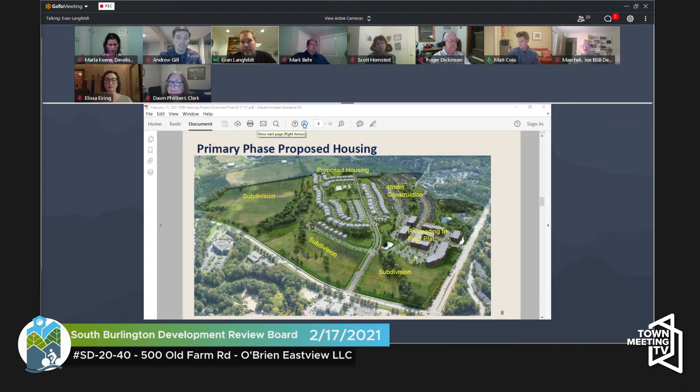Some are strictly residential, some are more mixed use, and some are more catered towards strictly commercial. What we've tried to do is create a holistic plan here. It's one of the last remaining large parcels in the city in the core development and density area. Our goal is to have a pedestrian-scaled development with a variety of uses and living styles, where you can walk to work and have amenities close to home.

You can advance to the next. So this is another aerial rendering, showing a broader conceptual build out of the site. I think what this really does is give a flavor for the long-term vision.

This refers to the energy and environment and the core location. So Eastview is proposing development that's centrally located in the city's core development areas, as designated in the comprehensive plan—services and employment that reduce commuting and associated environmental impacts, using existing infrastructure capacity and public transit to access them. So again, what we try to do is align our development very closely with what the comprehensive plan specifically calls out for.

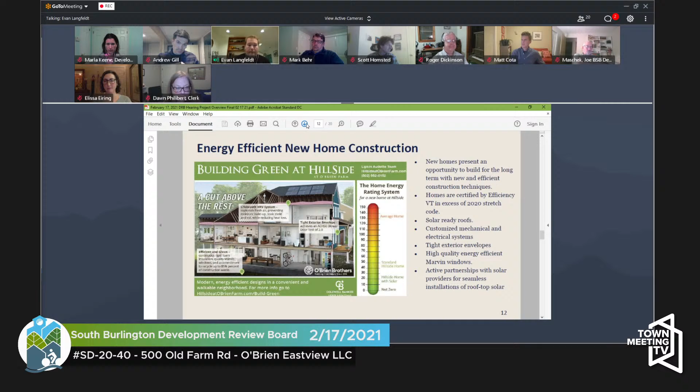That allows us to reduce the number of truck trips required to bring in material or truck material off site. Folks watching the Hillside development take place know there was a lot of rock to be dealt with, but the reduction in keeping that truck traffic off the surface roads was pretty dramatic.

The ability to reuse that material on site is something we should all be striving for in our projects. If you can use the resources that are there, you're not only saving surface traffic, truck traffic, wear and tear and congestion, but you're also reducing the fossil fuels and smog associated with trucking material in and out.

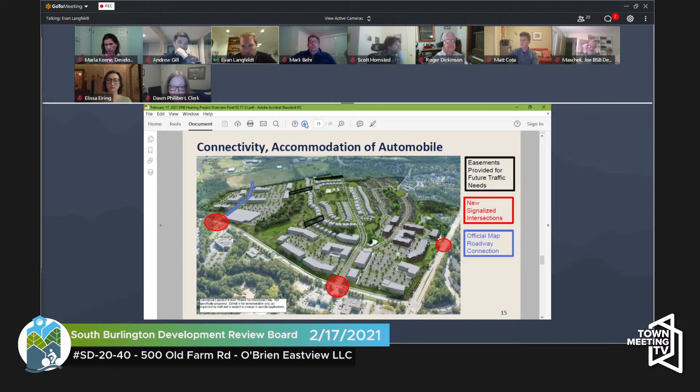So we can advance to the next screen.

The green space and recreational amenities planned for the project include two significant green spaces. The Hillside project features one that is a park containing a playground—if you've driven through the Hillside development, it's kind of a football-shaped park with a playground facility, landscaped, etc. We also have more natural areas, buffer areas, and walking paths, including a walking path around our stormwater area, plus some resource areas we've protected.

Eastview is going to continue along with that mindset. We're going to add 5 more large green spaces, and the combination of Hillside and Eastview will offer 35 acres of green space, equating to about 25% of the total project area—roughly 25% of the 145 acres will be open green space, which is a significant investment given the acreage of this property and the density of the area it's being developed in.

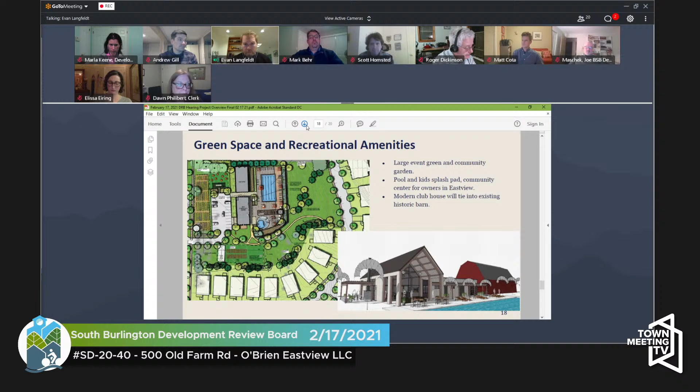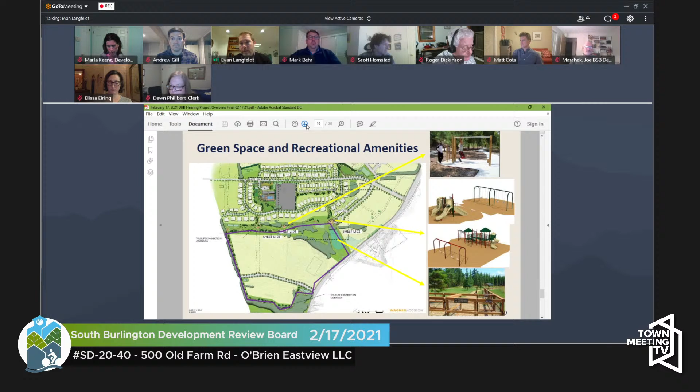You can advance to the next. So again, this is just showing some of the ideas that our land planner Joe and others have come up with, Wagner Hodgson have come up with, for how we could really energize and activate these walking trails and really engage our residents and the broader public into the green spaces.

We can advance. So that's really the end of the high level. I know I drove pretty fast there, but I figured we'll get through that and then get into the meat of the staff comments. But if any folks have questions or comments right now, I'm happy to answer them. Or if you guys just want to dive into the city comments.

Yeah, thank you, Evan. Appreciate that. Board, do you have anything you want to say over the general presentation or before we start staff comments?

I certainly heard a lot that we'll need to get into specifics, but perhaps the best course of action is to start where staff has reviewed and see how far we get tonight.

Starting with the context, going right to page 3. We're talking about 135 homes, a single family duplex and 3 family dwellings, as well as the residence club, as we just saw, 19 commercial developments. We are just talking about in this preliminary plat, just the homes and the club. We're not talking about any of the commercial developments. Is that right, Evan?

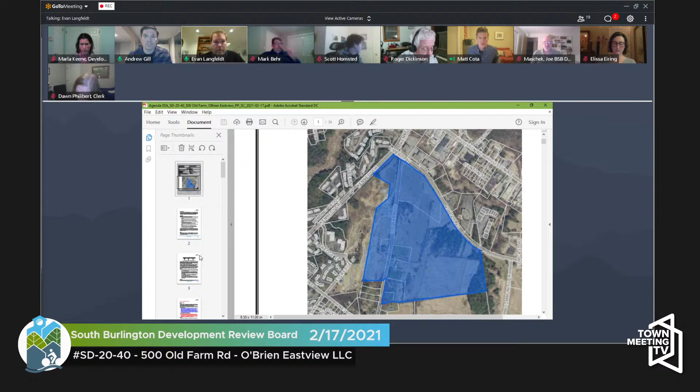Yes. Yep. Okay. So the first comment from staff is regarding phasing. As you know, we like to know when things are planned and to ensure that they happen in order. Staff recommends that we require you to provide a specific proposal for phasing, including triggers for specific features to include the recreation path network, parkland and amenities, trail connections to hillside, temporary gravel access to the exercise loop itself, improvements to the south end of Old Farm Road, and traffic improvements, including signal installation prior to concluding the hearing for this application. Such a proposal should include timing of each element and group elements in a logical manner.

Andrew and Evan, what's your reaction to that comment? I just wanted to throw out there that we had put together a PowerPoint that we sent to Delilah that included these staff comments, and as well, it's a different file, but yeah, this is the right file. So if you guys wanted to pull that up, there's a slide for this comment and every comment.

Is the slide reference specific phasing plans in order? It does. It has the phasing plan on it. The slide does, yeah. Can we take a look at that, Delilah, if possible? Yeah, it would be slide 3 there.

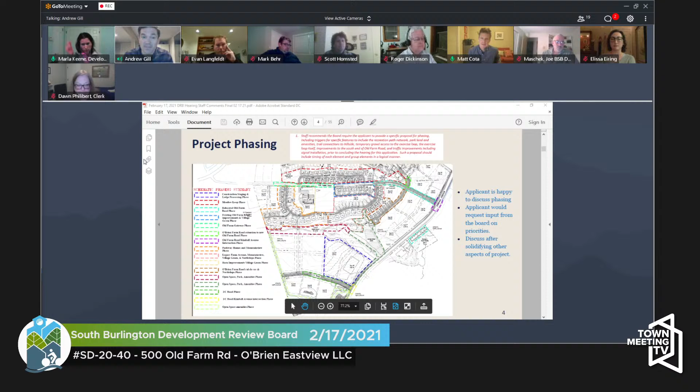Andrew, is that agreeable? We put together a picture for this in the email we sent, combining a couple of different exhibits, on page 10 of that PDF. This is the specific road this comment pertains to, lot 28. We've proposed 14 duplex townhomes on that road, along with a park, a playground, and a dog park. We intend to build the road to access those amenities, so we'd be seeking a decision on what that road needs to be constructed as. That's not to say that if we didn't put trees on the side of the road where the commercial buildings are, there isn't flexibility there, but we do need to build that road, so we would need some sort of approval that allows for that. We're open to suggestions on what that looks like, but those homes are part of the project.

Marla, is that your understanding? I'm trying to marry the comment with Andrew's response, is that making sense? Yeah, this comment was about the road Andrew points out, but also about the roads in the industrial commercial zone on the left-hand side of the page. Let me grab the pen here, so over here, and up here, so it's about those and about the one Andrew's pointing out. Can you draw which one Andrew is pointing out so I can see it clearly? That one, okay, got it.

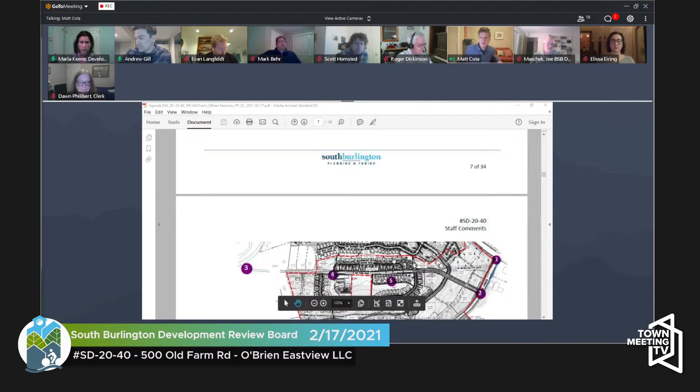Okay, so let's talk about the transitions between the neighborhood and the project with regards to the roadways. Well, should we start with Kimball Avenue and Kennedy Drive?

Applicant is proposing 5 lanes at the intersection of Kimball and Kennedy, where 3 lanes exist today. City goals do not support the intersection widening without careful consideration. The Kimball Tilly Drive land use and transportation study identifies no need for widening at this intersection. Tell us a little bit about this intersection and why you propose 5 lanes.

Yeah, I can maybe defer to Roger on that. I would just say to start that while the traffic study Roger completed noted that our full build-out might require 5 lanes, we had in fact stated in our narrative that we were going to stop short of that because we felt it was not appropriate given the goals we knew of the city, and we'd had conversations with staff about it.

Our suspicion was that by connecting the IC road to Tilly Drive, it would relieve enough traffic that the improvement would no longer be merited, but we haven't proved that out yet. I could let Roger speak a bit more to how that conclusion came about, and whether the Tilly Drive connector might fix it.

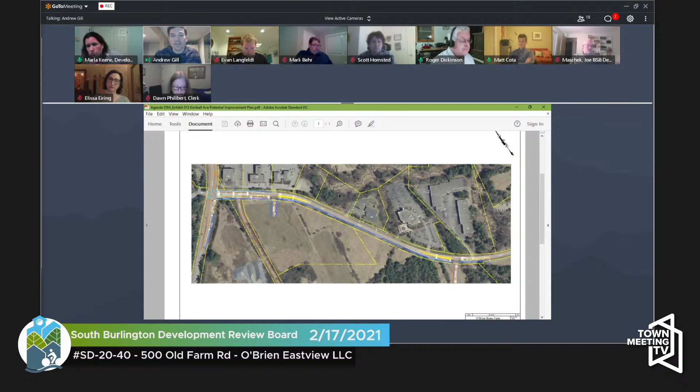To add to what Roger said, when he did this traffic study, he had a million questions to sort through, and we answered most of those in the most conservative way possible. So the study assumed nothing else in the city happens other than our project. What do we need to do to existing infrastructure to make it work? Intervening variables like the connection to Tilly Drive, our premise was we don't know if that's going to happen, we don't control Tilly Drive, so we need to understand what would happen if Tilly Drive never gets built while our project is progressing. Those compromises and conversations are what staff is recommending we get into, and it can change a lot of these recommendations based on the assumptions baked into the analysis.

We appreciate that the city and staff's recommendation is to take a more holistic, all-encompassing view, since this isn't happening in a vacuum. But to reiterate Andrew and Roger's point, we had to provide something within our control, so we took a conservative approach, but we're happy to work with staff and scale it back if possible. So what I'm hearing is where you proposed 5 lanes, we may stick with 3, to be determined.

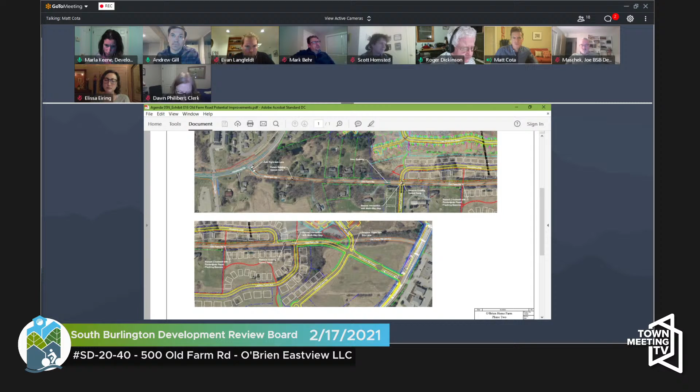On Old Farm Road itself, the traffic study doesn't specifically address calming measures. Staff recommends the board require the applicant to make the gateway two-way and incorporate detailed design into the civil engineering plans at the next stage of review. The Bike and Ped Committee took a look at this too, and there are comments about the shared use path. Can we just spend some time on Old Farm Road? I'm sure Andrew and Evan have prepared a lot to say, since the staff comments were extensive about this.

So do you want to walk us through what you're proposing? Traffic calming, or are you talking about the two at the entrance and the exit? Both, all three.

Andrew, how do you want to go through Old Farm Road? Do you want to start at one end and go to the other? Well, so I mean, yeah, so we can, I think the two intersections are fairly easy.

We agreed at the Hinesburg Road, Old Farm Road intersection that a right turn lane made sense and that's warranted. That's a sketch of it there, you can see the addition of it.

At the north end, the traffic light, I think there's some remnants of the fact that Roger had designed the 5 lanes at Kennedy Drive in how wide the intersection at Old Farm and Kimball is. I think that's going to be able to be narrowed down, and we're going to meet with you guys as requested and figure that out. So I think that's sort of stable, and we're happy to take a look at that.

To your point, Marla, we did remove the median that was proposed in the middle of that road. There was some feedback from a neighbor who owns the complex across the street, John Wilking, at the last hearing, at the sketch plan hearing, about the alignment of the intersection and not aligning with the existing driveways to the business complex. So we had redesigned Old Farm Road to align with that.

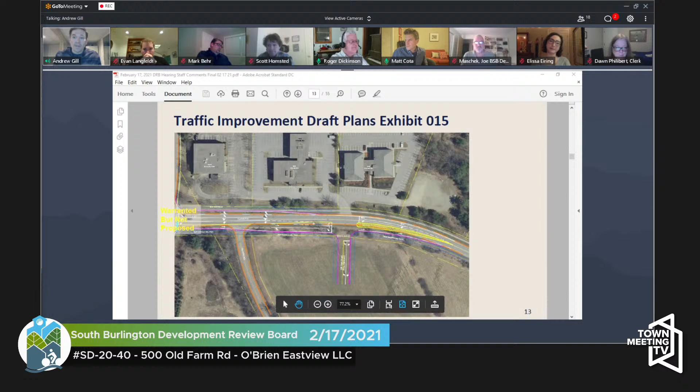But we believe the preliminary plat findings are integral to the success of that design. So either we would propose to provide those details toward the end of the preliminary plat hearing, maybe prior to closing the hearing, or ideally at the final plat level. We would like to better understand the entirety of the project, because Old Farm Road really is the center of what we're proposing, and understanding all the connection points in the development is critical to that design.

Well, what's the downside, Marla, of dealing with the traffic calming and some of the other measures at final rather than preliminary?

Traffic calming is a bit of a red herring. It's in the first sentence as we talk about Old Farm Road, but then the comments about Old Farm Road under that same heading go into the Bike and Ped Committee's extensive comments recommending a recreation path all the way along Old Farm Road, and comments about whether there should be parking on the road. I think one thing we talked about at sketch is that traffic calming can be retrofit, but it's better when it's a function of good design.

So there's a question about staff comment number 9: what is the typical cross section of Old Farm Road? What does it look like? How does the interface between the homes, the rec path, the sidewalk, the parking, and the street trees create traffic calming?

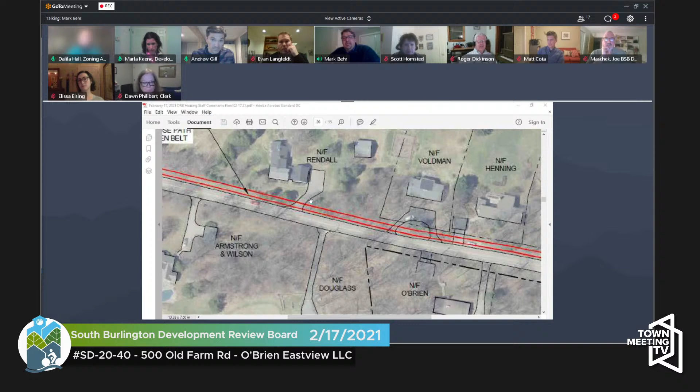Matt, can I ask a question? So this is showing sort of a rec path, bike path on the north side of Old Farm, which looks like it would create the most amount of impact. What about the idea of doing it on the south side of Old Farm, where the houses are set further back and you wouldn't have as much impact on existing single family use directly adjacent to Old Farm?

I'm just gonna say, as someone who walks Old Farm frequently, maybe not frequently enough, but it would break my heart to see some of that vegetation taken down, because it's part of the beauty of that road. It feels very treed and leafy, and I can't imagine those homeowners would be thrilled.

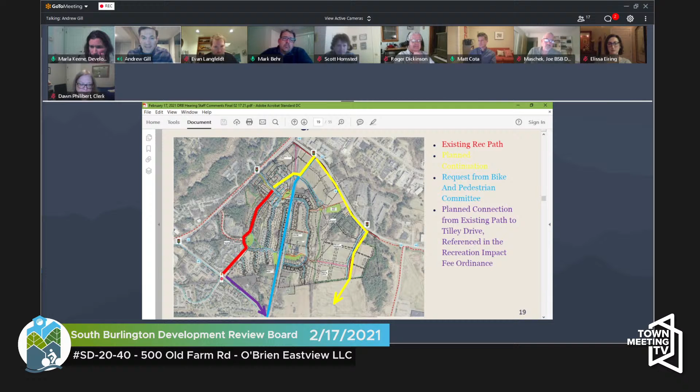And the city certainly has a right of way and could run infrastructure down there. I think, if you go back a couple of slides, you see that there's a rec path about 1,000 feet away that also runs from Hinesburg to Kimball Avenue. So a rec path isn't the only form of safe pedestrian communication. I think there are opportunities we could look at that might be less impactful and still preserve that.

Yeah, another consideration here is that while we are obviously planning on adding a lot of homes accessing off Old Farm Road, the earlier discussion about traffic calming measures—the intent is to keep this a kind of low speed residential road, and then to have the additional outlet.

Right now people are using Old Farm Road as a cut through because there isn't another option. That's the north-south road running through the mixed IC district to connect to Tilley, which I think is that release valve the city has always planned for in their official map, which we are replicating here. The goal is not to develop this road as a high-speed cut through, it's to tamp that down even though we're adding homes on it. Having a sharrow type use, as opposed to an off-street bike path, I don't think is incongruous to what we're proposing here, even though we are adding more homes.

Am I correct in saying that you are not proposing any improvements beyond the limits of the project on south Old Farm Road? Sorry, let me rephrase that. Am I correct in saying that you're not proposing any sidewalk or off-road bike facilities south of the project area at this time? That's correct, and what we propose currently, in terms of bike and ped south of the project, yes.

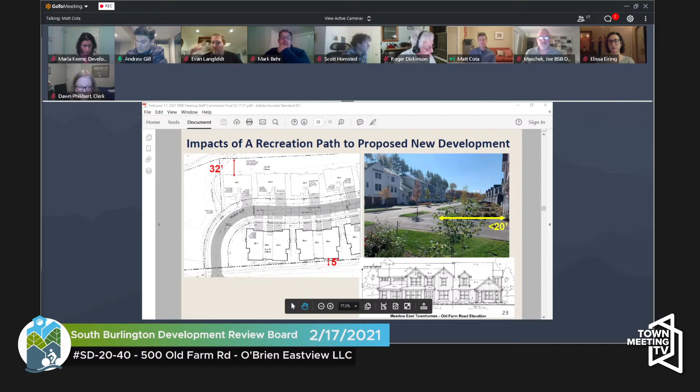How do you feel about parking? I have to say, I did not understand this, nor did I understand the next comment. If you can't park on the street, how can you have parallel parking? Marla, is there a slide you can bring up for that? What am I missing, Marla? Well, that's exactly the point - you can't park on the street, but so then where are you going to park?

And so we're suggesting that there should be on-street parking. Oh, you are suggesting that there be on-street parking. Yes. Okay, I didn't get that. Okay, thanks.

So we had proposed a certain number of on-street spaces. We're happy to look at the number of spaces that we proposed. Along Old Farm Road is sort of the easiest place to propose them, because it doesn't have an impact on coverage, since Old Farm Road is an existing city right of way.

So the coverage isn't part of the project calculation. I had highlighted in the slides we sent you Marla's feedback that the site coverage is maxed out, and so adding coverage anywhere requires removing it somewhere else. That's figured into the amount of parallel parking we've provided on, for instance, Legacy Farm Avenue.

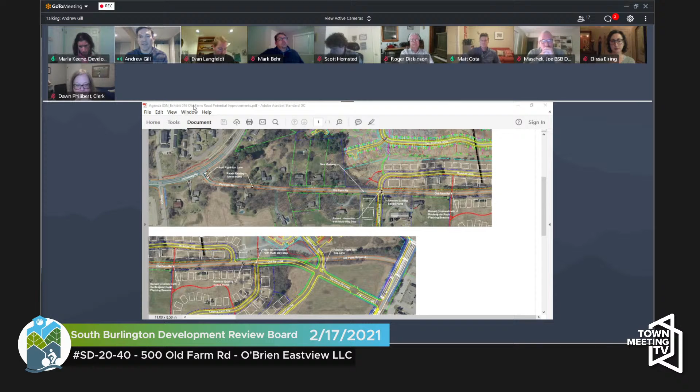So you keep asking about the layout - Delilah, if you could show the picture from the staff comments, I believe it's at the top of page 8. It's just an overall plan that we've excerpted from their plans that has some purple numbers on it.

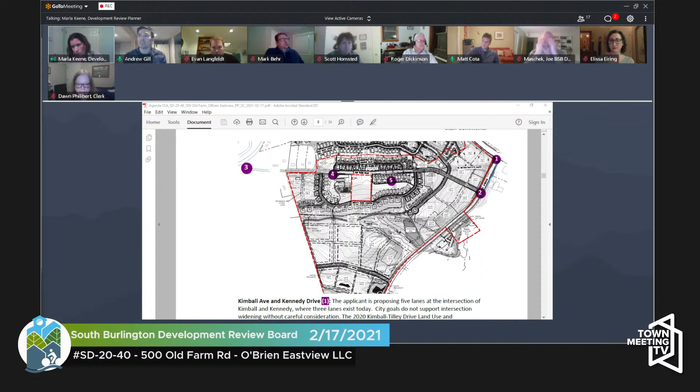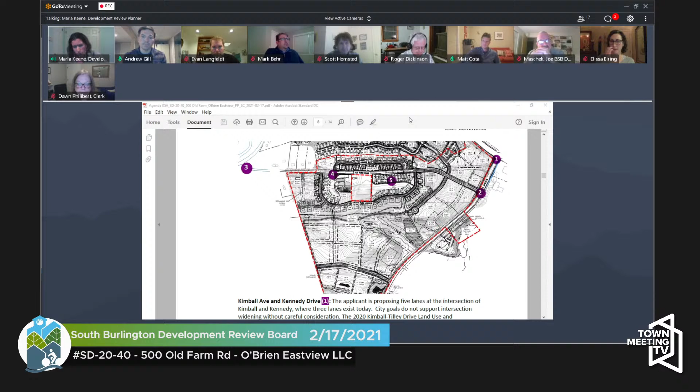Homes face streets - you're going to have the streets, and then you're going to put the homes along the streets. The location of those streets is going to dictate what homes fit where. What is it that you're looking for feedback on about the homes that is not tied to the streets, before you can think about the location of the streets?

In general, we proposed a one-way alley connection for those homes on lot 31. It seems like from staff feedback that came off well. But that's one area where certainly the alternative of locating different style units is impactful.

The intersections between Meadow Loop and Old Farm Road didn't align. That was a concern. Sounds like that's not a concern. We've proposed a cottage court and a certain cottage unit alignment, driveways and intersections, and how those relate to the street.

We've got a setback. I believe we were looking for an adjustment to the actual right of way on Old Farm Road in order to put the Meadow Loop homes where they're shown. I think they're only 1 foot from the right of way, so it would end up needing the right of way reduced by 4 feet to accommodate that, which we would do in conjunction with moving the right of way at the north end of the project, since we already have to go through the whole process of altering it anyway.

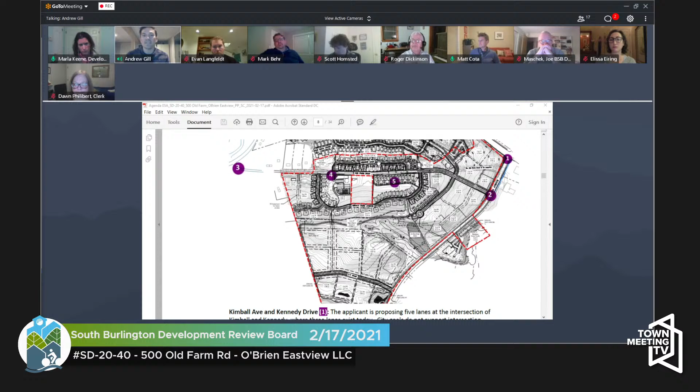That was done to preserve the space between the hillside homes and the new homes proposed. We could certainly reduce the rear yard setback, but we felt like picking up the presence of the homes to Old Farm Road was beneficial for traffic and everything else we've been talking about. We could push those units back another 5 feet, further from the edge of Old Farm Road, but it would reduce that village feeling. If the board was supportive, reducing the right of way by 3 or 4 feet wouldn't be an issue, given that it's a 60-foot right of way and a 20-foot road.

So Matt, Evan, or Andrew, sorry, I know you're not the same person — Andrew just listed 5 things they'd like feedback on. I don't know that every single one of those is explicit in the staff comments. He asked about the alley, the intersections of the Meadow Loop, the cottage court, their setback requests, couched with the Old Farm Road right of way, and then the alignment of Old Farm Road. Would it make sense to just step through those things rather than go off script, or do you want to stick to the script?

That's fine. Can we take them in chunks here? What should we start with? And is there a better page for me to show this on, because if I zoom in on this drawing... Yeah, absolutely.

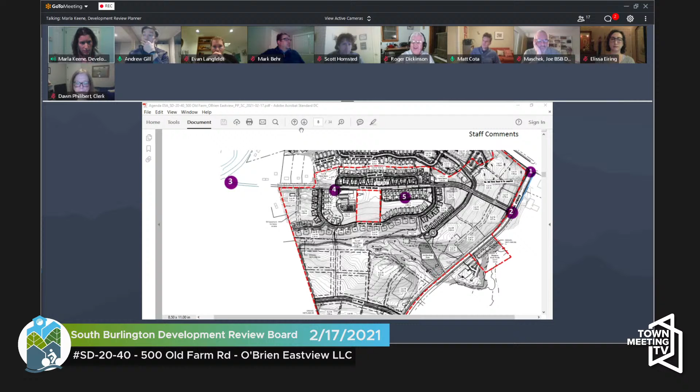So Delilah, if you would go to Exhibit 5E — that's where that page came from — and you can go to sheet 8, I believe it is, and that one should never be blurry no matter how much you zoom in. I've memorized what page all of these things are on. Okie dokes, give me a second.

Share it. Exhibit 5F also is pretty helpful — it's the master plan that sort of shows things. Let me get that one open so I can flip between it before I go into the next one. 5F, got it. Okay, so that's open if we need to go into that. Let's go share this first one, 5E.

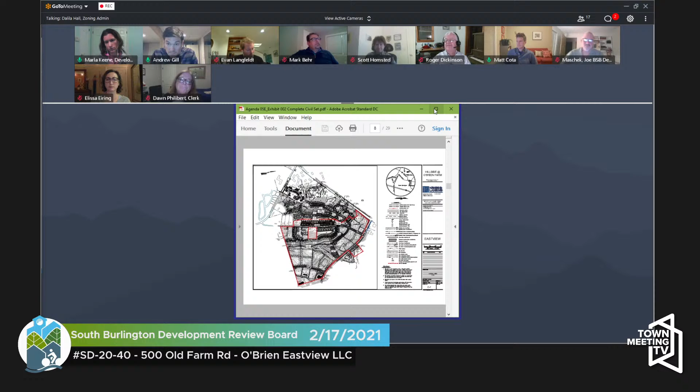There. So which intersection do we want? Well, maybe just biggest picture to smallest picture — you want to start with the realignment of Old Farm Road? Does that make sense, Andrew? Yeah, sure, I mean that seems like that's been generally viewed positively.

I'm not sure if it needs — just looking at the rest of the agenda for tonight is pretty extensive — but I think that we reoriented that to align with the property across the street. I think it sounds like generally that's sort of okay; there wasn't any feedback on it, I don't believe, other than to work on the intersection, which we can do. Yeah, is the board okay with this? Yeah, this makes a lot of sense to me to redirect the road.

And it would make the intersection, especially those just going around Kimball Avenue — to a layman, it makes it seem like it would work functionally much better. But...

So then the other major thing, we had added the cottage cluster and moved the roads. We used to have the two roads you're looking at right now, Meadow Loop and Legacy Farm, intersecting at a four-way, and we had gotten feedback that was awkward because the hillside road at the top right was so close to the corner, and there was going to need a 20-foot retaining wall there because they were so different in elevation. So we changed those orientations around and aligned the other end of Meadow Loop with the parking entrance for the barn amenity.

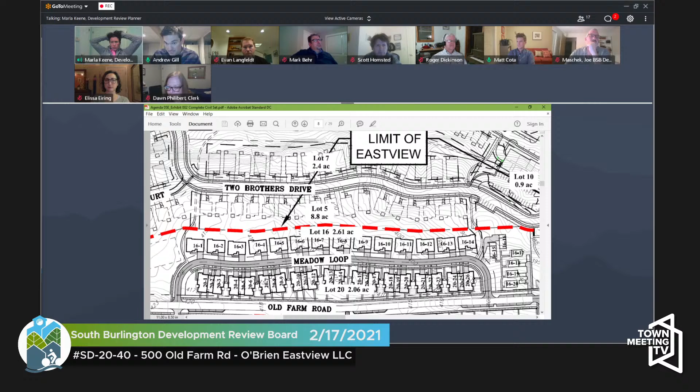So you just went through a whole bunch of different things. The board did have a lot of feedback at Sketch about the sort of ends of Meadow Loop and Legacy Farm Ave. How's everybody feeling about it now?

I have some questions. So Meadow Loop, the bottom structures are triplexes, correct? That's correct, for the most part. And then there's a duplex in the middle. Meadow Loop are single family homes? Yes, correct.

But where there was a path that was talked about, was that for the Meadow Loop homes, where there would be space between the home and the garage, or is that another area? That was different — that was to the alley lot on lot 31. Okay, all right, good. Sorry, I was confused. Okay, thanks.

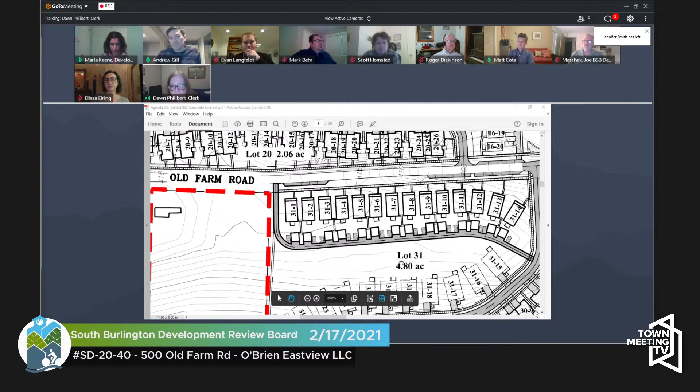So the backs of the triplexes will be facing Old Farm Road. Yes, and we've designed the homes to essentially have 2 fronts to them. While the garages are accessed off the loop road, they have a street-facing presence on Old Farm Road, because that is really the pedestrian experience. But we also didn't want the elevation of the home facing the loop road to just be a service entrance, because you've got other homes on the other side facing them.

Right, so that's what I was confused about. Okay, so we tasked our architects and land planners with coming up with essentially a 2-sided home that's attractive on both sides. And I think we've been successful.

Thank you — and I'm going to step in, this is Joe from BSB Design. One of the reasons why we're so close to the Old Farm right-of-way is that it was important for us to include front porches and a more traditional style along Old Farm Road, which pushed us close to the existing right-of-way. So part of the whole reason for the look and feel of Old Farm Road was the front porches and the old-fashioned, more neo-traditional style.

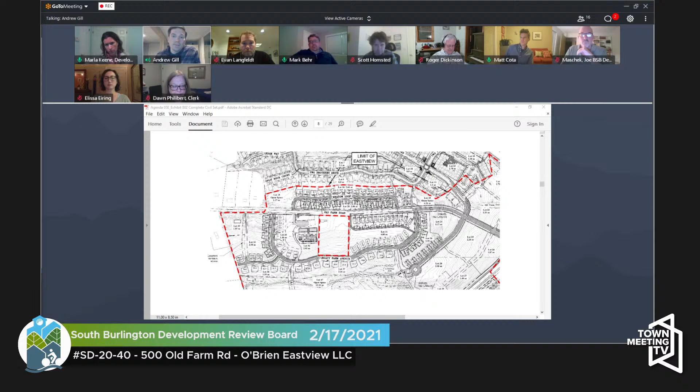Joe, do you want to pull that up? Yes — kind of backing up too, because if nothing is coming to mind for folks, we don't want to necessarily go looking for things to change.

Well, we can defer discussion of the architecture to later if people are okay with the general concept of these things. I think Dawn's point is one that we didn't mention in the staff comments — that these are triplex facing single family homes, but the alignment is dramatically different for Meadow Loop and Legacy Farm Ave from before as well.

What do other board members think? I like this alignment better, I like how it comes out and then goes right to the parking of the barn amenity. I don't know if we've talked about what we've had to do with the ledge or the drop off there at lot 16, 14 area, if that's changed significantly since sketch.

But is that going to be a problem area? We spent a lot of time talking about that corner of Meadow Loop. No, we put those cottages there, and I think that's squared away.

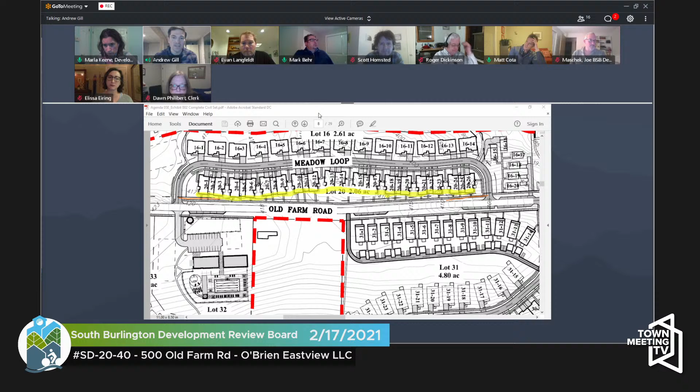And I believe there's also a pathway through in the middle of 20-14 and 20-15. There's a sidewalk connection that runs all the way through.

What's the distance from the porch in like 20-6, so your faux front porch, or whatever, your back front porch, to the roadway there? Well, the distance to the roadway is further. Scott might have a better idea. It's about a foot from the right of way line, but then you've got a 5-foot sidewalk and then a 6 or 7 foot green belt. So it's probably 12 or 15 feet from the road, something like that.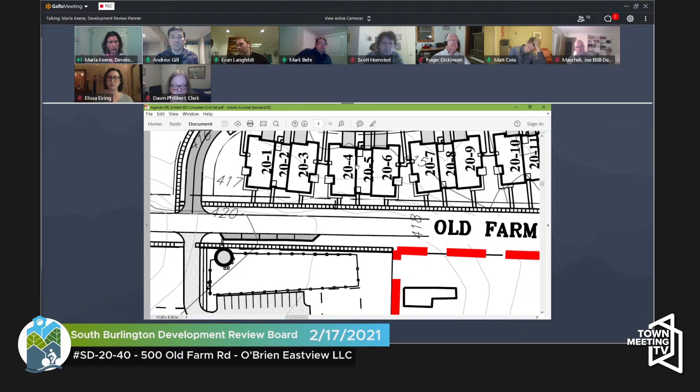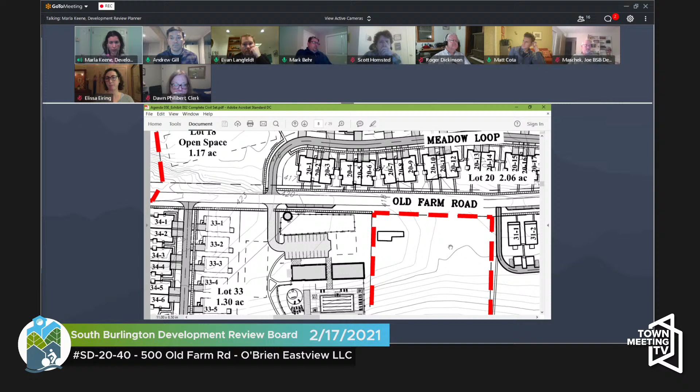But Marla, what's the rule? You can only go 5, right? You have to go 5? Right, so what they're suggesting is, since the city has to abandon the existing Old Farm Road right-of-way and accept a new Old Farm right-of-way at the north end, they're proposing to modify the Old Farm Road right-of-way through here as well. So instead of a 1 foot, they would move the right-of-way to create 5 feet.

Now, are they proposing making the right of way narrower through here or shifting it across the road? Oh, that's a good point. I mean, we could do either, probably.

Can I weigh in just a little bit? One thing I think is important to point out is the Old Farm Road right of way here is 66 feet wide, which is much wider than typical. Certainly 60 is very normal, and most of the right of ways in this development are actually 50. So that can be reduced without it being odd.

What I think makes this sort of unique is, one, it's worthwhile to look at the architecture, particularly on those townhomes, to see how it relates to the streetscape. But two, on both the east and west side, all of these homes have rear-loaded garages, so you don't have curb cuts, which negates the setback issue from the street a little bit.

It helps it disappear a little bit, not from a right-of-way perspective, but from the pedestrian experience—you're looking at a little bit of lawn, a path to a sidewalk, but no cars, no garages, no driveways. It's really trying to get a village-center feel on this road, and it could have an interesting look.

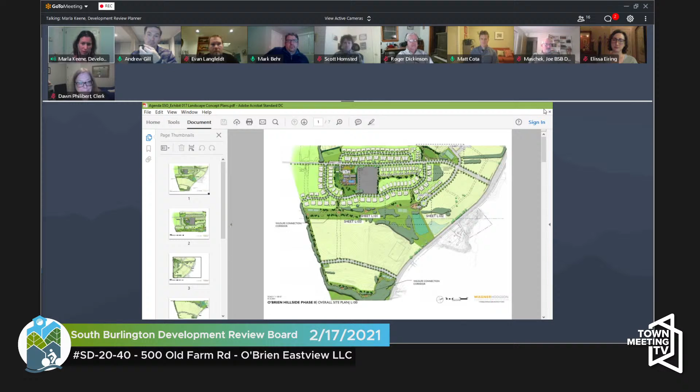I'm going to get on a soapbox—not really an issue in this case, since everyone on the board seems to understand why this request is being made for reducing or shifting the right-of-way width, and thinks it makes sense. But one thing emphasized early on in the staff comments is that the applicant has made some assumptions about what they want to build, and those, until approval, are malleable. So if the board hated this, there's more than one option.

It's not just about reducing the rear yard setbacks and having the homes closer to the hillside—they could make the homes 4 feet narrower. I just want to remind the board that nothing is final yet. We haven't said homes must be 2,000 square feet. A lot of assumptions have gone into this, but again, it sounds like everybody's okay with it. I just wanted to use it as an example while we're waiting.

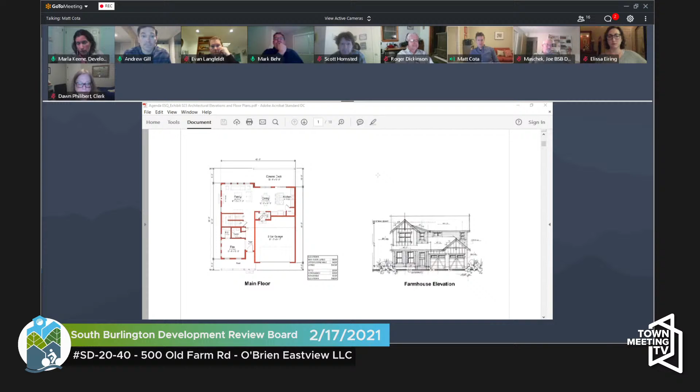What's involved in changing the right-of-way for Old Farm Road? It's a big process. Big process for who, though—is it for us, or is it the City Council? Planning commission and city council have to change it. Yes.

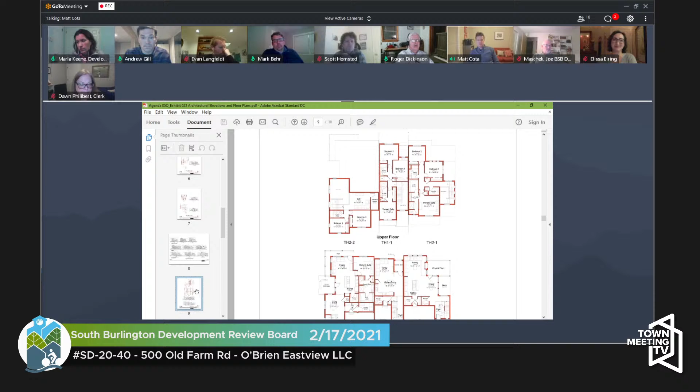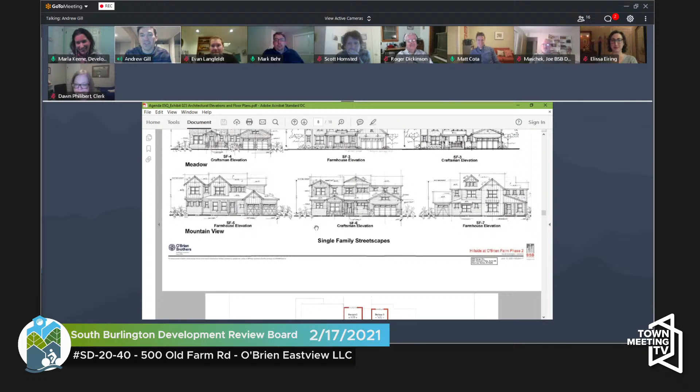So good luck with that if you win on March 3rd. March 2nd—don't vote on March 3rd, it'll be too late. To be clear, we would not be saying let's alter the right-of-way if we weren't already in that process for the north end of Old Farm Road. It just seemed like it wouldn't be much additional work since we're going to be dealing with it anyway.

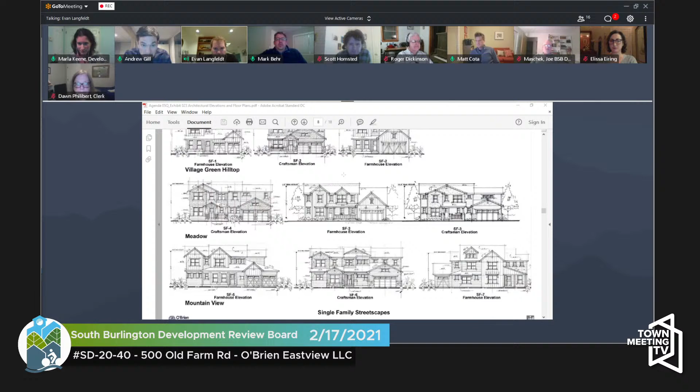To Joe's point, these homes originally were shorter, and then when we started adding decks and porches, trying to figure out how to make them live well despite having 2 front yards, they got longer. That's a challenge. These are the single families, but I think we're looking—I'll go one more page. There you go, go down a little further. Here you go.

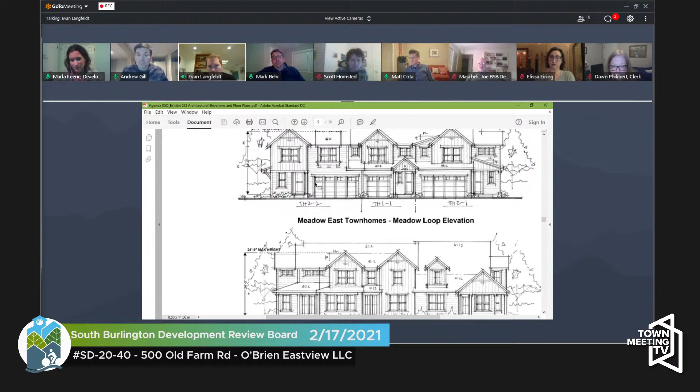So these are examples—you can see the upper elevation is the meadow loop side, facing the other homes, and the bottom elevation is what's facing Old Farm Road. Those are doors, right above where it says TH2-1. That's a door; I'm not quite sure why it's showing up like a long window, but those are front doors.

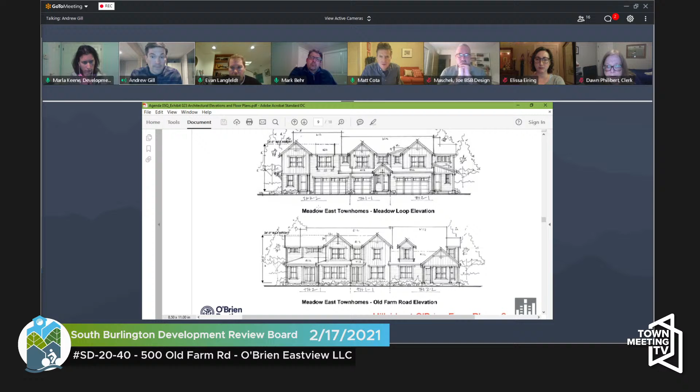Wait, so is this a triplex? Yes. But does the middle one only have a 1-car garage? Correct. Yeah, that confused me. So the middle one is a smaller unit than the two on the outside. Correct.

Still a 3-bedroom unit, but it's a smaller unit. Yeah.

So again, we tasked our designers with coming up with a streetscape on Old Farm Road that was kind of a traditional look, very handsome looking. And then we also tasked them with essentially the same task on the loop side, but we had the parking requirement there as well. I think it's been pretty successful.

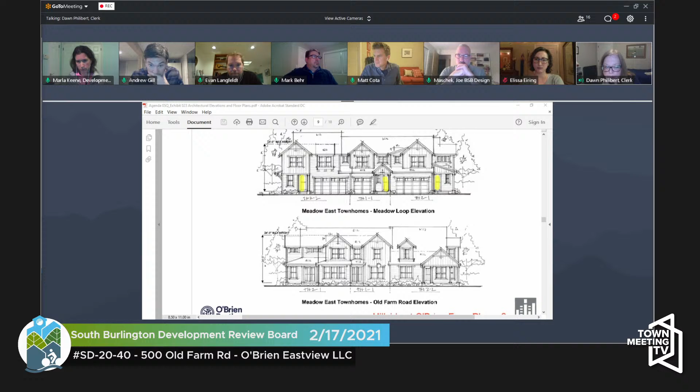I don't see the porches on the Meadow East Old Farm Road elevation. Yeah, it's just the way that this is. There you go. If you zoom in a bit, you can see where it says TH2 dash... now I can't see it, dash 1, that's a porch roof right there. Yeah, right, I see. Yep.

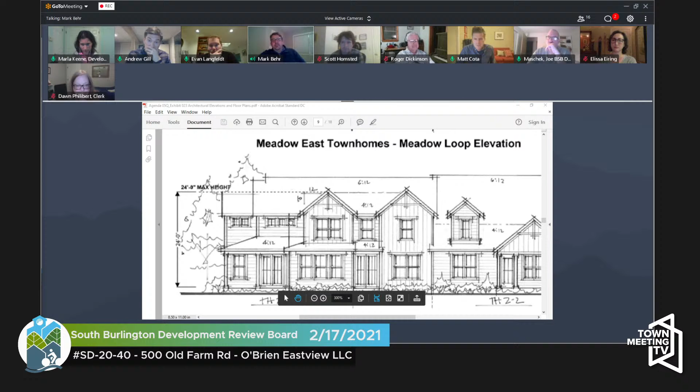Well, I'd be interested to hear what you think, Mark, about this design and its closeness to Old Farm Road. It doesn't bother me. I think that they're attractive triplexes. It definitely is a 2-front building, where it doesn't read like the back of a building with the parking garages or the garage doors. It definitely has an attractive look on both fronts of it.

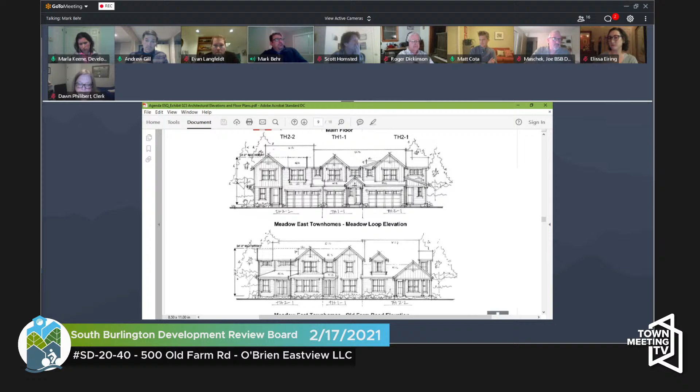I kind of like the really tight closeness to Old Farm on the ones on the fringes. Part of me, this is kind of out there, but I almost wonder if you create a green space by bumping the sidewalk in so it almost maintains a similar distance the whole way along the perimeter of these, but you get a deeper green space sort of in the center of it where the oblong football shape is.

Because right now they're triplexes, so they're kind of townhome style. So you're going to have this long sidewalk leading up to a unit with just a little bit of green in between that's not going to be really used on a communal basis. But if you have the sidewalk cut in and follow units 7 through 20, sort of pretty close to the unit, you get almost like a Boston row house effect feel to those, then you get a decent amount of green space between the sidewalk and Old Farm Road to be a communal area.

Yeah, I see what you're saying. And then it becomes less of a... I mean, they're going to be a part of an HOA, I assume, and the lawns are all going to be taken care of, not by the individual. So it is a shared space.

Is that possible? Is there a reason why that can't happen, Scott? He's the guy that always tells us why we can't do it. There are some grading concerns here. You're probably not looking at a perfectly flat lawn out here.

To make the single family units work on Meadow Loop, Meadow Loop is significantly below Old Farm Road. And so there would be some grade that would need to be made up, but there's nothing in principle to keep it from working.

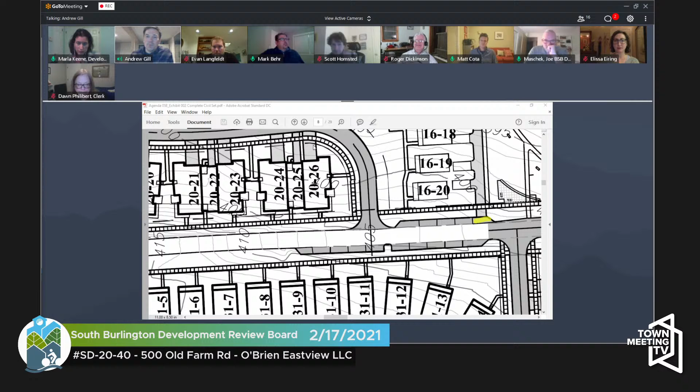I think that's a lot of feedback, and I think it's great. We're probably all set on having enough to get moving on the Old Farm Road details. So the one thing of your five things we haven't talked about is the alley on lot 31. I think that's coming up soon in the enumerated comments. If it's soon, then cool, go for it.

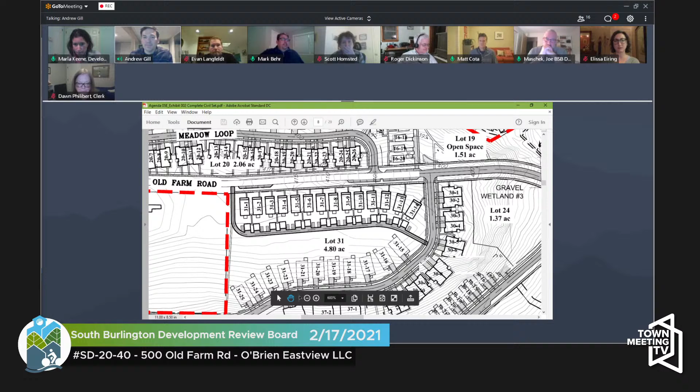Boy, where are we in the enumerated comments? We talked about the typical section of Old Farm Road prior to issuing a decision of preliminary plat. Sounds like the applicant has agreed, that's what they're going to do, they're not going to wait till final. Comment number 10, taken as a whole, transportation comments point to the concept that this is a transportation system, not a series of intersections that need improvement. Staff recommends the board direct the applicant to look at the traffic network comments holistically.

And then here we go, lot 31, item five. The applicant has designed western homes on lot 31 with rear alley serving garages.

So let's zoom in there. Okay. Staff supports this configuration, though the applicant has expressed reservations about the marketability of detached garages.

Staff considers detached garages create a rear yard space and a degree of privacy that other homes do not have, because of the advantageous street presence created by the rear loading configuration and the unusable space created by the proposed configuration between the eastern homes and the alley. There's a short section of steep grade immediately behind the eastern homes on lot 31. Staff recommends the board direct the applicant to provide rear loading for the remainder of the homes on lot 31. If the board has concerns about the feasibility of this configuration. Staff recommends the board invoke technical review.

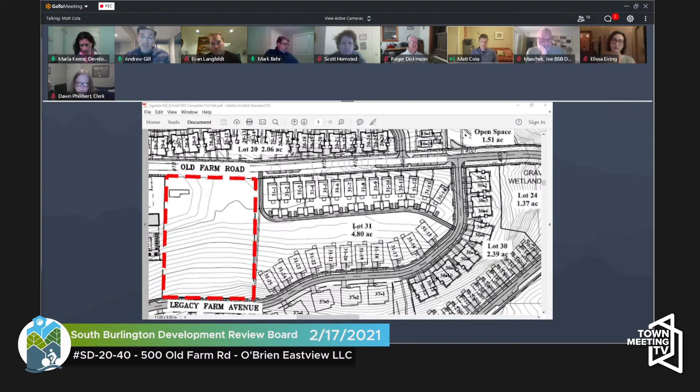I think the honest answer is we haven't figured out what the exact right solution is. There's a number of different ways we could grade it, and a number of different ways we could design the homes on lot 31.

Scott could speak about the options, but the intent is to create a usable rear yard for those homes. The preliminary design right now has basically a flat spot out the back of the unit for a relatively short distance, 10 to 15 feet, and then a short bank, still a mild slope, up a little bit, and then a flatter spot out to the road.

One option we've talked about would be to have a different unit design where we could make up some of that grade with the wall of the building rather than a sloped wall. Another thing we've talked about would be pushing that bank back towards the alley to create more of a yard right outside the back door of the house.

Like Andrew said, there's a few options. We certainly think they're all workable, and we certainly think it's still going to be attractive yard space for the owners of those units.

And the distance between the back porch and essentially staring at the other garage, what's the distance there? From like 3119 to 31.8, or the garage at 31.8? Quite a ways, it's over 100 feet. 110 feet. Oh wow, okay. All right, yeah.

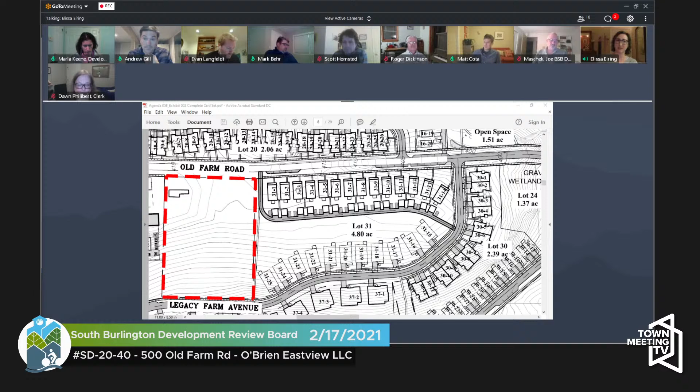No, I agree as well. I like the design the way it is. I wouldn't want to put in more detached garages. Sort of see how it goes with what you've got.

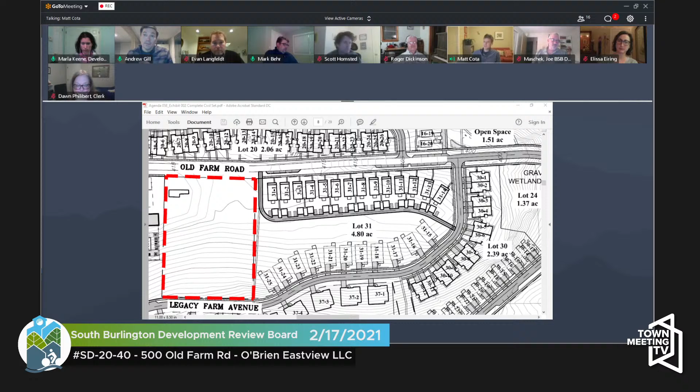Number 12, connections and transitions between the project and Hillside. Feedback from the board at sketch was to improve these connections and, by extension, transitions between the master plan area of Hillside and the development proposed.

There's only one vehicular connection between the two properties, located at the north end of the development area. The board should talk about whether we want the connection to Hillside to occur via Split Rock Court as part of this project, or whether the applicant must demonstrate that the connection via Ledgeway can work in the future.

Okay, so let's look at... yeah, so Split Rock. I had written like two pages about this, and Paul made me take them out. But I'm gonna talk for a minute.

Sure. Split Rock Court, Ledgeway was originally approved with this sort of potential to connect here. Laurentide Lane was approved with the potential to connect here, and then Split Rock Court was with potential to connect there. At sketch, the board had expressed concern about the only connection to Hillside being over on this right-hand side of the page.

So the question is this one vehicular connection - is it adequate given that there are pedestrian connections here, and here, and here, or should this connection at Split Rock Court happen? The Ledgeway connection can't happen now because these three parcels are not part of the application.

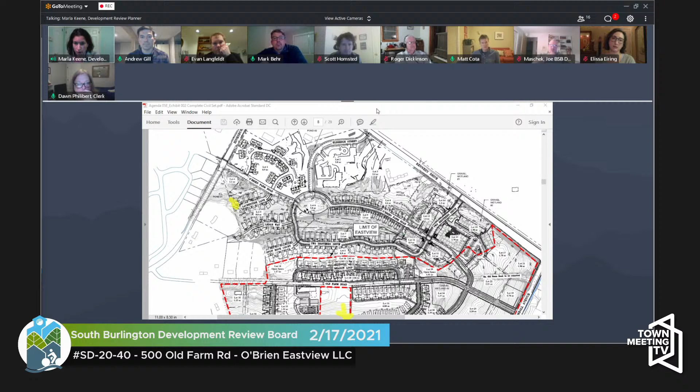Is there any opportunity to do anything at the northern end of Meadow Loop to Two Brothers Drive? Or is that so close to the other connectivity it doesn't make sense? There is a pedestrian connection, but that's where at Sketch we spent a lot of time talking about the topography. And some of those homes are awfully close there too.

Yeah, you know, I was one of the advocates for more vehicular connectivity between these developments. But I was also one of the opponents, not supportive of the streetscape design of Split Rock Court and Ledgeway, with the sidewalk as part of the street width squeezing these houses in tighter, because I was really concerned about people parking on the sidewalk and people having to walk around it, and kids riding their bikes.

So the last thing I want to do is introduce more vehicular circulation through these little dead-end streets, which I know are designed so that if those other developments get built out, they're supposed to be connected - but I wouldn't support connecting through these tight residential streets I had concerns with to begin with. Yeah, I agree, I don't want to lose the open space. The cars can drive around, or they can be encouraged to walk or bike. Yeah, it's one of these things - I wish we had it, but I don't advocate the one solution we do have to achieve it.

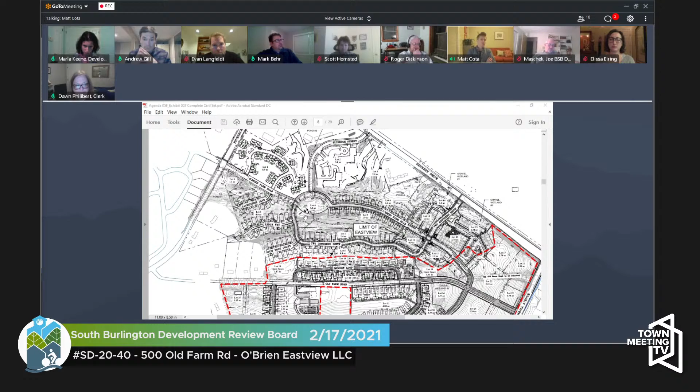And we've created - in case those parcels are ever sold and developed and become part of this - we've created the infrastructure by way of our regulations to ensure that connection could happen at that time, right? Yeah, so that was sort of part two. And I don't know if it made it into this - this may have been what Paul made me cut out.

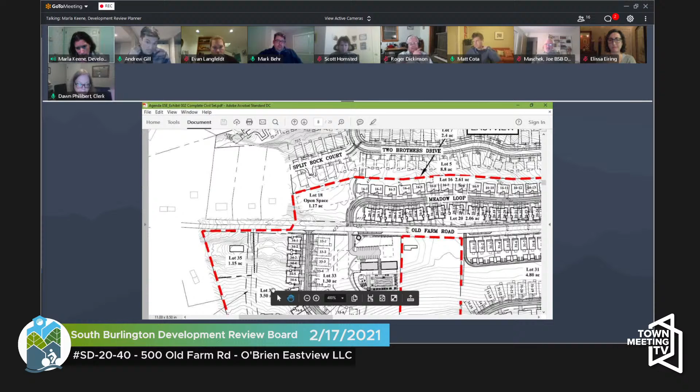If you pan down and to the left a bit, there's this planned right-of-way, 50-foot easement for future access. So I guess this probably comes later, but where does that land relative to Ledgeway?

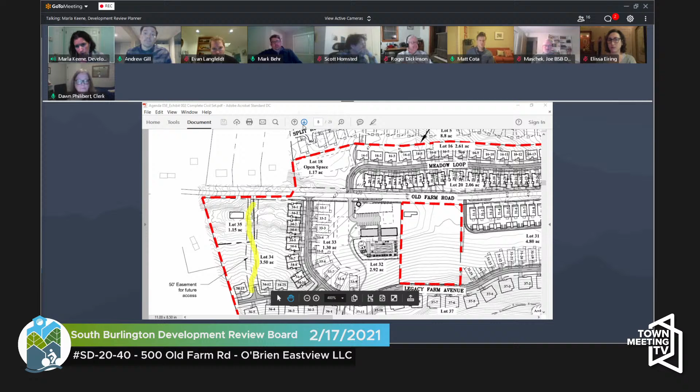Marla, what do you mean? Where does it land? Well, I think I can see it. It involves one or two properties that need to be part of this development. But we're in the business of setting up development for future success too.

Right, so I guess I haven't seen it the way Delilah just drew it before, because I was looking at it and I said, oh, that shoots out this direction. It doesn't really line up, but I see what you're saying, Delilah. But I'm not sure that for your original concern about the person who lives on Ledgeway getting over to Kimball, I don't think that saves them anything.

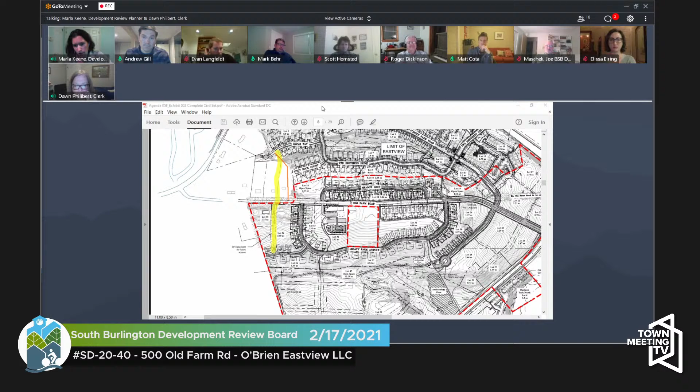It was about this area, people working down in this commercial district that they're building.

Also, when O'Brien Farm Road is the only connection, that might lead to future congestion when it's fully built. Well, that's a good question, does the traffic study look at that? Was the question, will O'Brien Farm Road be overwhelmed when it's fully built? I think that was part of the traffic study. Roger could answer. Right, yeah, we looked at that, and no, that's not gonna happen. There's plenty of capacity there.

Okay, so I think we've exhausted item 12. We're not going to change the design of the open space at this point in order to accommodate a connection for cars.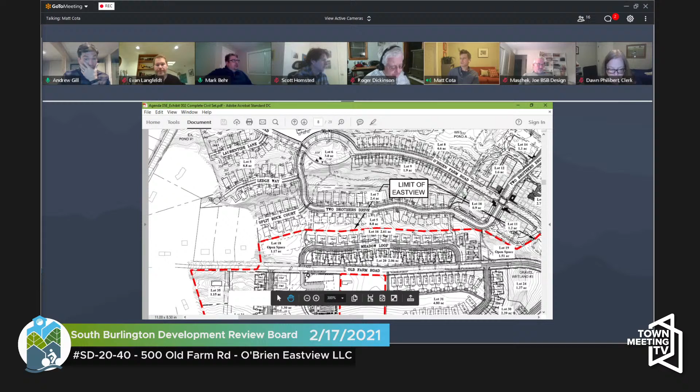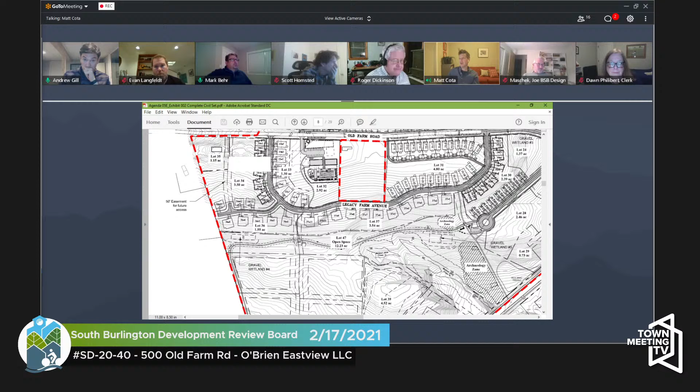Number 13, talking about the Tilley Drive PUD has recorded an easement to the subject property line, which staff considers does not appear to connect to the proposed IC roadway. Staff recommends the board require the applicant to modify their proposal to provide a viable collector roadway connection to the dedicated easement as required by the official map, and demonstrate coordination with those responsible for the Tilley Drive PUD. Any such modification should provide access to each of the proposed lots in the IC area and accommodate the board's direction as it pertains to connections between the residential phase and the IC phase of this PUD.

Can we explain this a little bit more, the transitions within these zoning districts? Do you guys still have the slide deck that we sent? Because we had Scott draw this. Yeah, which page do you want me to go to? Slide 34 shows this on an aerial photo, this particular item. Okay, let me just hold on a second, I opened up a bunch of things.

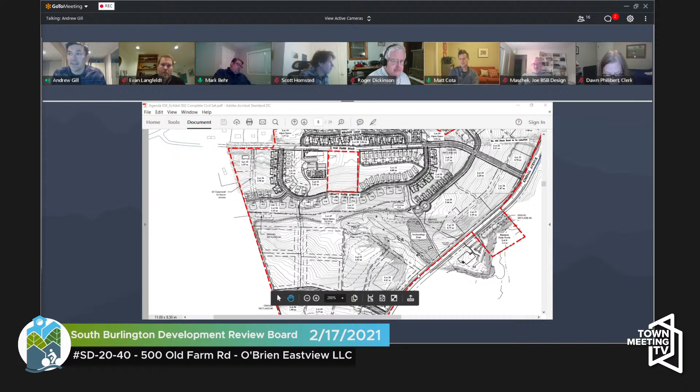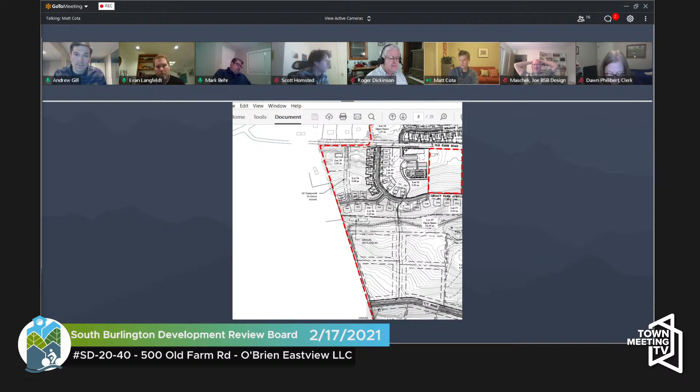So the Tilley Drive PUD includes what? They've recorded either an easement or a right of way that goes to our property line in some of their approvals. No, what I'm saying is does the Tilley Drive PUD include all of the office buildings on Tilley Drive, the medical buildings, or just some of them? Yeah, it's all of the office buildings, including some that are built.

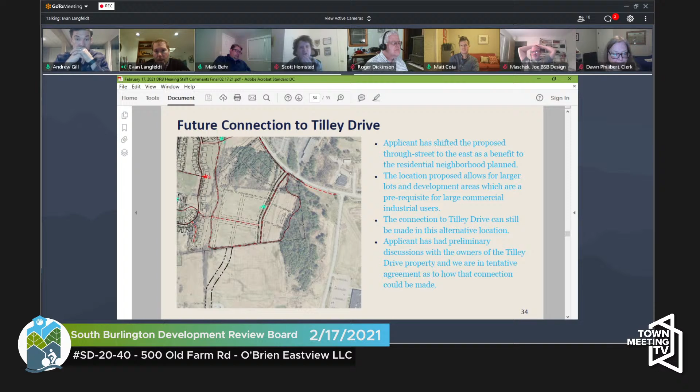For what it's worth, I've spoken with Bob Bouchard at Pizzagalli Properties about this specific issue on the shifting of the connector road, and his general response was he didn't have an issue with it as long as we were staying in open communication about how those two sections would connect. But jogging up the property line, he thought was a reasonable solution because they do have some limitations on the developable area of that remaining lot that they have. I think there's some wetlands there that they're trying to avoid.

Yeah, there's a wetlands map in the staff comments that shows the limitations on the drive. And you can see, I guess it's not on this slide, but you can see the right of way on the slide that's up now. And then the area where the industrial commercial road tees into the Tilley Drive right of way is just wet, I think.

Well, I'm trying to think—I don't know how much of your time we have, and we have a lot of sort of more complex feedback, but why don't we get a proposal together of how these two things come together and bring it back to you guys? That sounds good, thank you.

Number 14, staff recommends the board undertake a similar discussion of the connection between Hillside and the current project by asking the applicant to describe how residents will travel between the residential area and the industrial commercial area to the east, and then provide feedback to the applicant on whether the provided non-vehicular connections between the two areas are adequate for the currently proposed design.

Is that what we were just talking about, Marla, or is it talking more about how we're going to get the pedestrian walkways there? So this is moving away from Hillside to Eastview, and is now within Eastview from the area currently proposed for development to the industrial commercial area that I had circled on that previous slide. So how do you get from the homes that are proposed to the industrial areas just to the south of it?

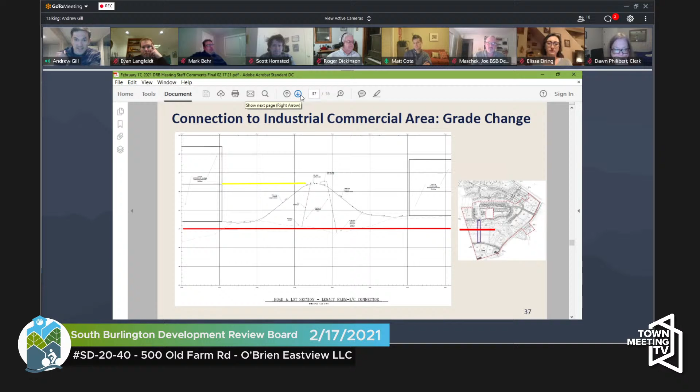challenging. There's a lot of earth movement that would be involved in making this connection. And in terms of the benefits, we have slides that talk about it, but essentially, if you're creating this vehicular connection to enable industrial commercial users access onto a small 20-foot wide residential street - we don't know what those users are, but we do have a slide that demonstrates some of the potential uses. If you go to the next one, this is a crudely superimposed vision, but it is 100% possible in the IC district that those two lots end up looking like this. So requiring a road into that parking lot doesn't make a lot of sense. It also would be prohibitive of that particular style of use being built, although that's the style of use that the zoning is sort of conducive to.

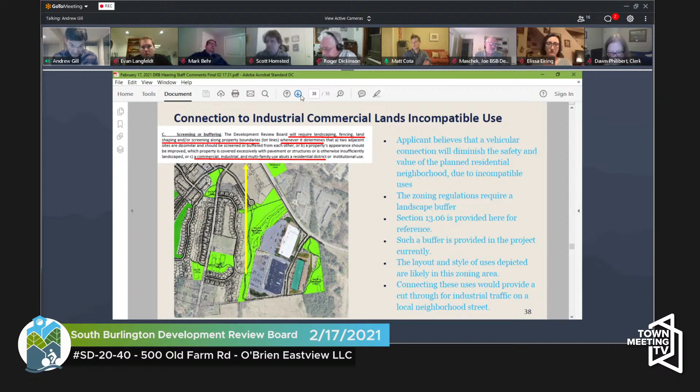So I think we've had a vision of that area being a mixed use development, and it's just not the reality of what's allowed under the zoning regulations. So we felt that providing that easement and that space, in case there ever was a viable opportunity to do something here, made sense. But creating a right of way would sort of cause more problems than benefits.

So if I did live on Hillside or Eastview, and I did work at the new Pete's RV in the commercial industrial area, how would I get there? If you go one more slide ahead, I think we did a map, or maybe it's two.

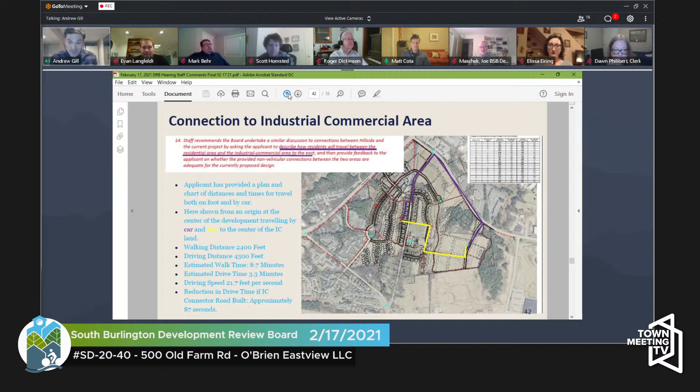And I guess if you skip one more ahead to your question, Matt, sorry, I don't have these memorized, maybe two more. There it is. So we did a plan, part of the packet, that gives you calculated travel times. This is illustrating a walking path to work at the IC at Pete's RV, or a driving path. We calculated the distances going at an average speed.

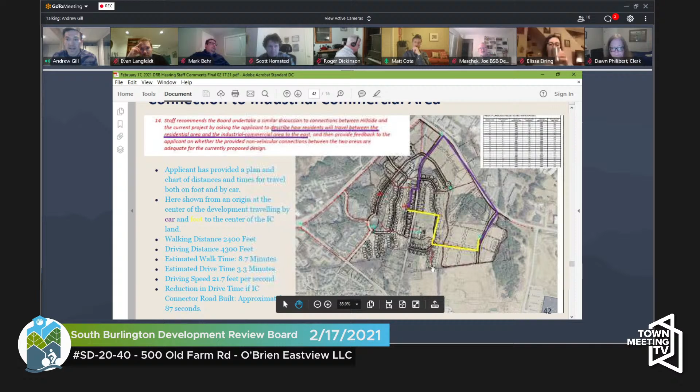Essentially, your time to walk to work would be 8.7 minutes. Your time to drive to work would be 3.3 minutes. At the average driving speed of 21.7 feet per second, the reduction in your drive time if the IC connector road was built would be approximately 87 seconds. So by creating this connector road, you'd save a commuter coming from our project to the IC about 87 seconds in the car, for all the environmental and other consequences.

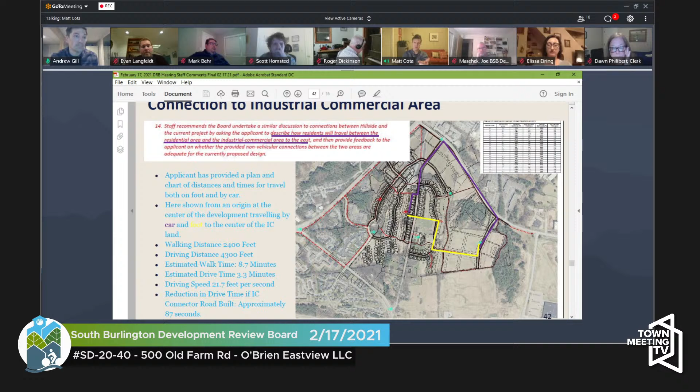So again, you've got a slope problem, a problem that it screws up your natural resources area, your nature trails and all that, your habitat corridor. You've got a problem that this is a commercial area where you could have a lumberyard or Pete's RV, and you're not going to have that natural nexus. But I also get that it almost seems like two different projects here, without the connection, which it is. I mean, it's the same piece of land, but it's totally different - it's not a mixed use like you have over in the northern end that you're working on.

I think there's a lot of people who live in cities, and even in Vermont, who would kill for the short auto drive that's spelled out in purple here. I mean, that's not a bad commute.

Yeah, interrupting that corridor just to create a nexus or more direct connection between the homes and the commercial industrial area is not... it's tough for me to get over that one. Yeah, it doesn't make a whole lot of sense, other than creating a connection between the projects. I mean, but does there need to be one? Or should you just take Kimball Ave to get from your home on the hill there to your job at Pete's RV down the hill?

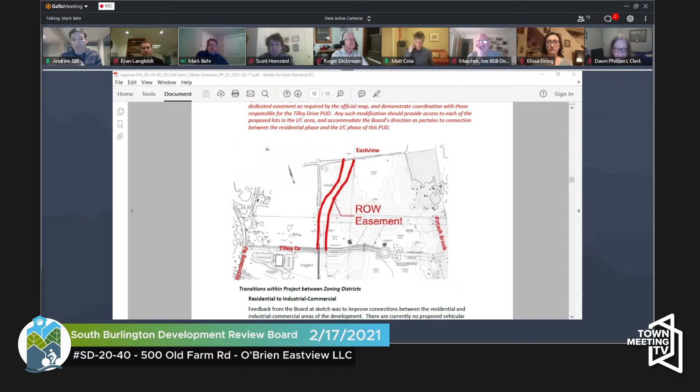Yeah, Matt, I agree. I kind of go back to the fact that early on I was a big proponent of making these connections and having more interconnectivity. But when you see the technical side of what it takes, you have true impediments to getting that connection to happen - the road profile would be crazy. I think getting a pedestrian connection is sufficient, and whether it's planned when the industrial park gets built out, whether it's the first permit or some trigger mechanism, I'd like to see it actually happen.

Anyone else? It just seems like it's a lot of effort to no end to add that vehicular connection.

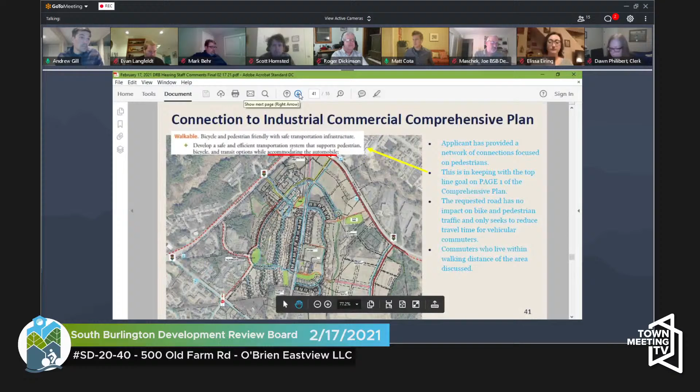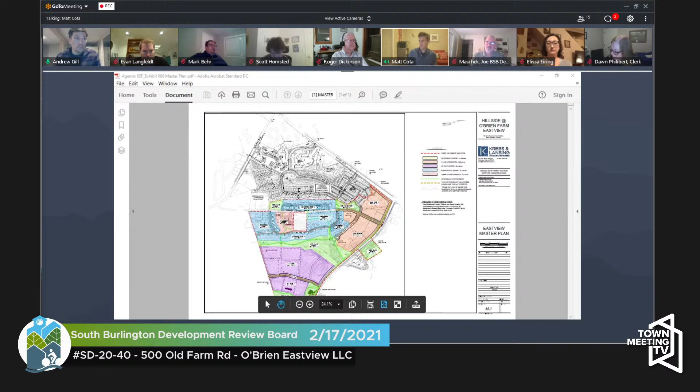By the way, I'm looking on a different screen at the aerial rendering, which is fantastic because you can really see that slope between the Eastview neighborhood and the commercial industrial area. You can see the outline of pedestrian paths, that connection. I'm not sure, to qualify as a PUD and make sure there is the connection, if what you have on that aerial rendering is sufficient. But yeah, that area should stay green. It should stay a corridor for the habitat, and I don't think we should build an automobile road in between.

That's straightforward feedback.

Okay, we're at 10 o'clock, so we went through 15 comments of 47 - my bonus 5 in the middle there. So it's almost a third. You sure you want to go for one or two more? No, I can't.

I do want to say first off that if anyone listening tonight has a comment, we are not going to close - they can submit in writing, comment at their next hearing, or comment now. So I'd offer anyone in the public listening in, if you'd like to comment, please enter your name in the chat box or just shout out. Listening for anyone to shout my name, looking at the chat box, I don't see anyone. John, you're not still there, are you? No. Okay.